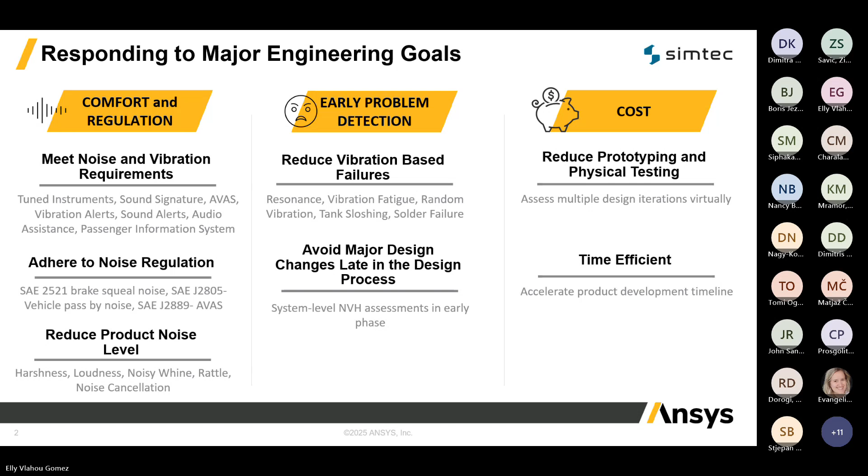And third, cost. Physical prototypes and testing are expensive. Simulation helps us cut those costs and speed up development by reducing the number of prototypes we need. Now, NVH isn't just about the motor. It's everywhere in the vehicle.

We are talking about powertrain and electric motor, cooling systems and fans, tires and suspension, wind and aerodynamic interactions, structural components, etc. Simulation lets us look at all these systems individually and at the full vehicle level, so we can predict and optimize NVH performance before we even build a prototype.

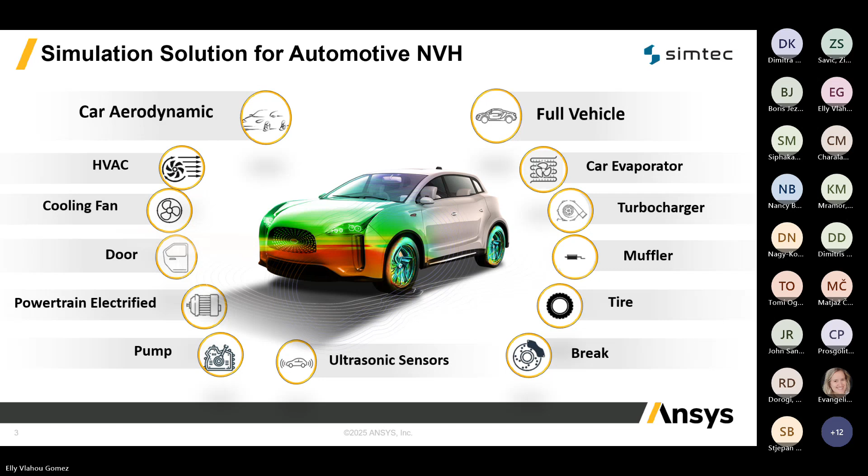Traditionally, NVH validation happened late in the process, during physical testing. That's expensive and risky because if you find a problem then, it's too late for big design changes. What we are doing now is shifting that workload earlier into the design phase using simulation. That gives us 4 big advantages.

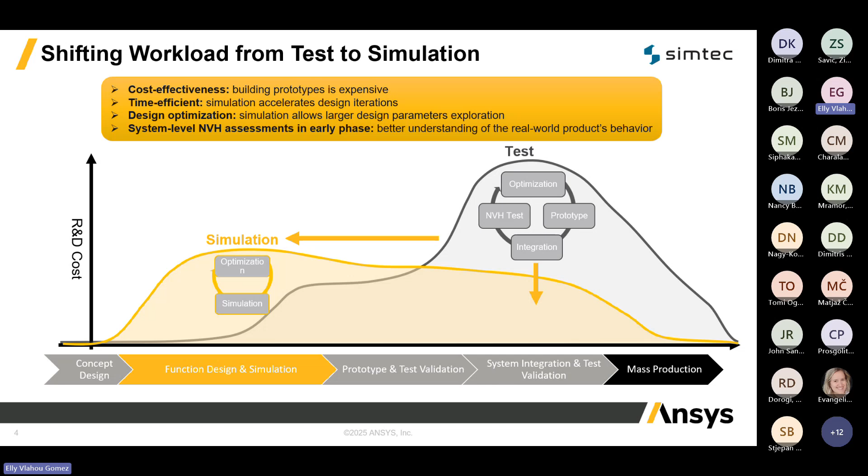It's cost-effective because we need fewer prototypes. It's faster, so we can iterate more quickly. It allows design optimization, exploring more options virtually. And most importantly, it gives us early system-level NVH insight so we can prevent surprises later on. This shift is critical for meeting today's aggressive timelines and cost targets.

Before we go deeper, let's make sure we are all on the same page about what NVH actually means. NVH stands for noise, vibration, and harshness, a term that describes how mechanical and acoustic energy from systems like motors, gears, fans, or road interaction is perceived. Noise is the unwanted sound generated by different vehicle components. Vibration is the oscillation that passengers feel through the structure of the vehicle.

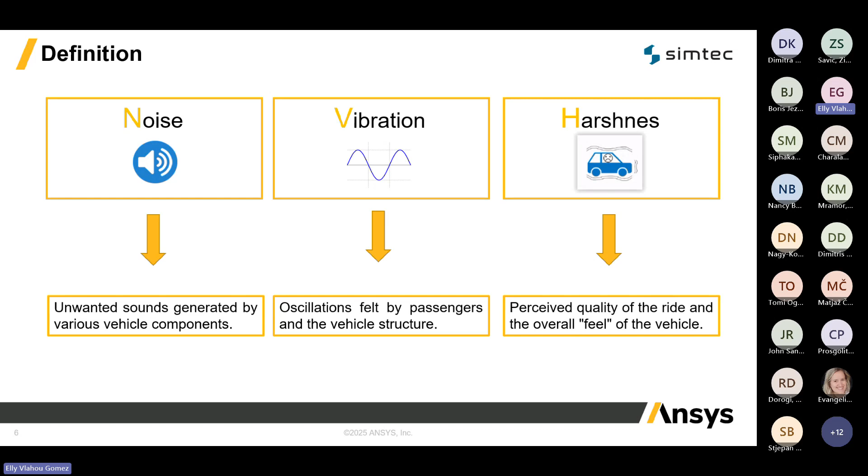And harshness is more subjective. It's about the perceived quality of the ride, the overall feel of the vehicle. So NVH isn't just about sound, it's about the entire experience of comfort and quality.

As we mentioned earlier, noise in a vehicle comes from different sources. For convenience, we group them into 3 main categories: electrical, mechanical, and aerodynamic. On the left, you can see examples of each, and on the right, how they all combine at the system level. To control NVH effectively, we need to understand and characterize all these sources, from individual components all the way up to the full vehicle.

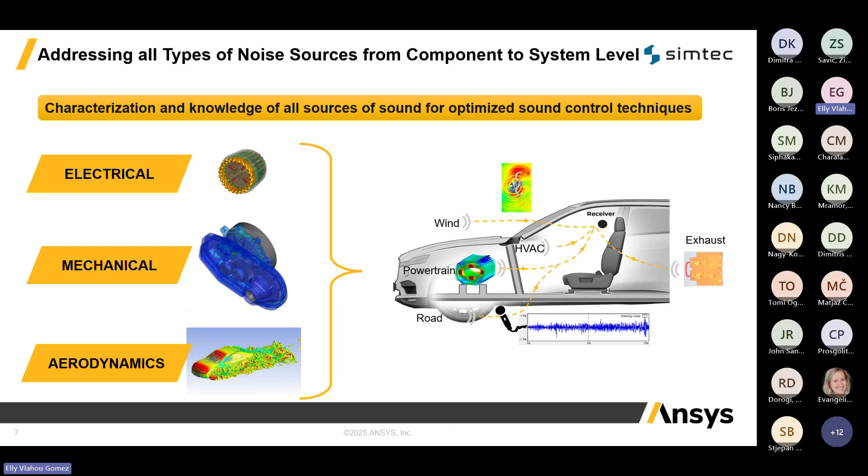Let's move on to some basic simulation workflows for NVH analysis using different Ansys tools. These are 4 example workflows that Ansys provides for NVH analysis. Each workflow combines specialized tools to capture the physics accurately and predict sound and vibration behavior. Let me walk you through them briefly.

First, the e-drivetrain sound workflow. We start with Ansys Maxwell to calculate electromagnetic forces on the rotor and stator. These forces are then passed to Ansys Motion for a multi-body simulation of the drivetrain system, including force transfer to the housing. Finally, Ansys Sound is used for order analysis, psychoacoustic evaluation, and sound design characterization.

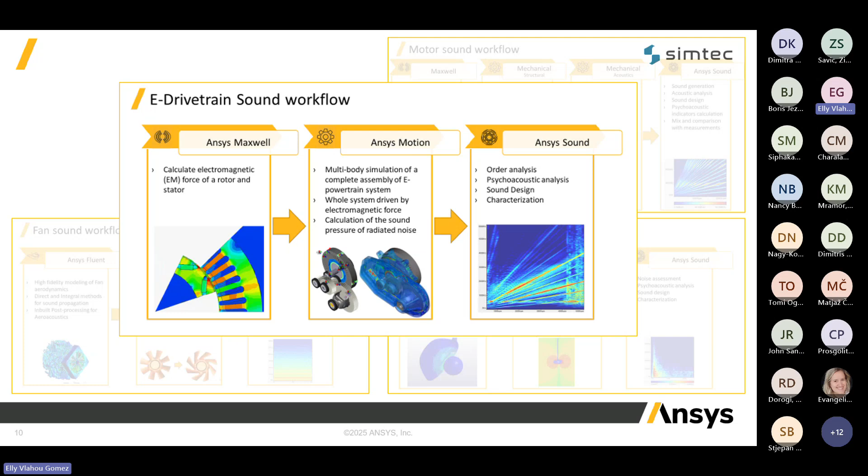Next, the motor sound workflow. Again, we begin with Maxwell to compute frequency-dependent forces from electromagnetic harmonics. These forces feed into Mechanical for structural analysis to calculate structural response and vibration. Then, using Mechanical for acoustic analysis, we predict radiated noise, and finally, Ansys Sound evaluates sound quality and compares results with measurements.

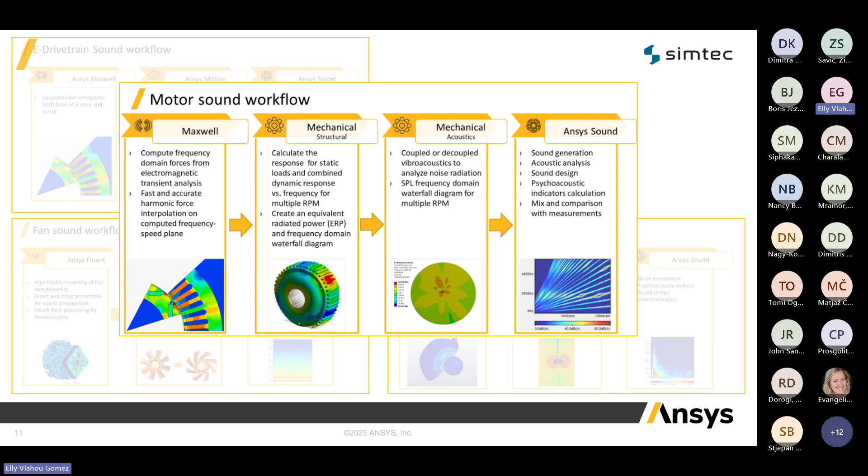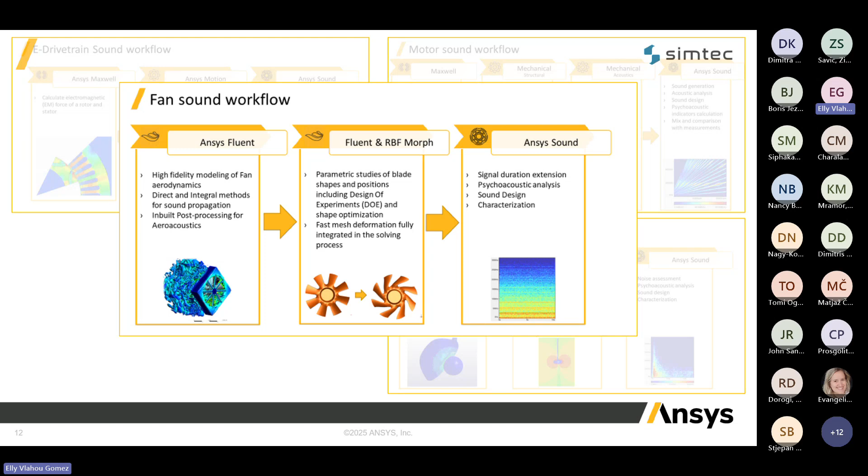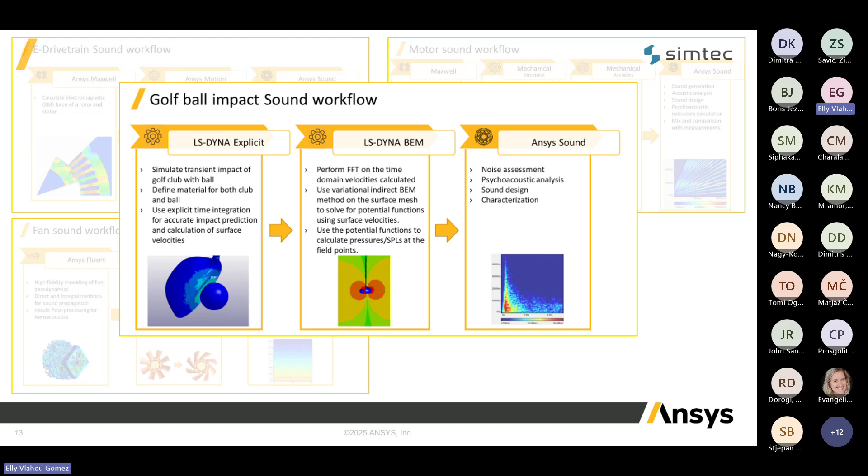Finally, the golf ball impact sound workflow. This uses LS-Dyna explicit to simulate the transient impact of the ball with a club, followed by LS-Dyna boundary element method for acoustic radiation prediction. The results are then analyzed in Ansys Sound for noise assessment and sound design.

These workflows demonstrate how Ansys integrates multiphysics from electromagnetics and structural dynamics to acoustics and psychoacoustics to deliver accurate NVH predictions for electric motors and related systems.

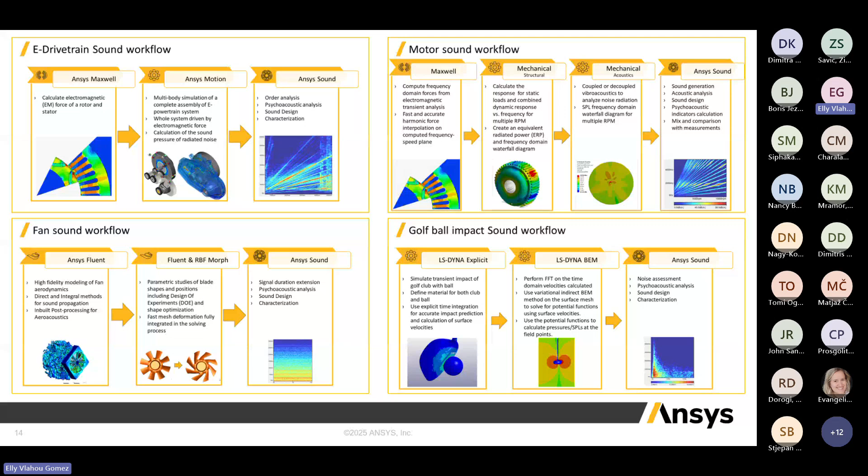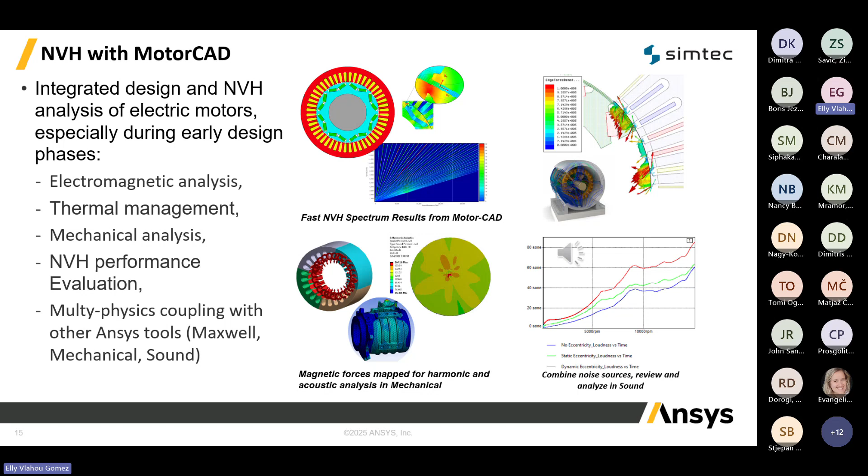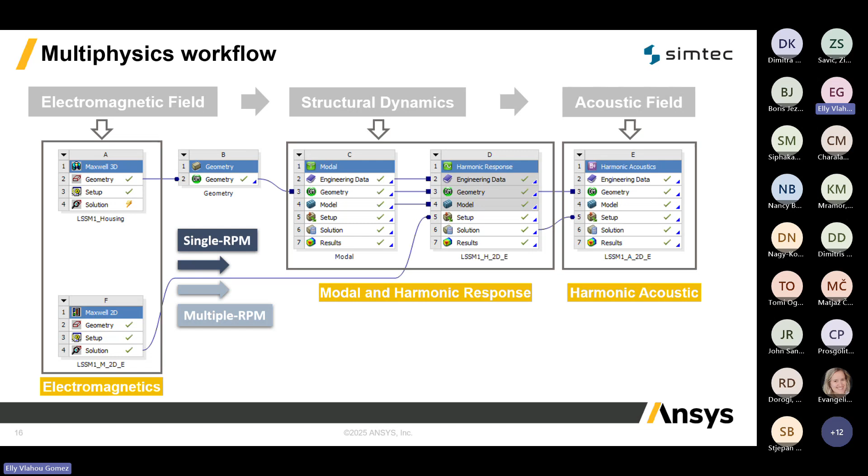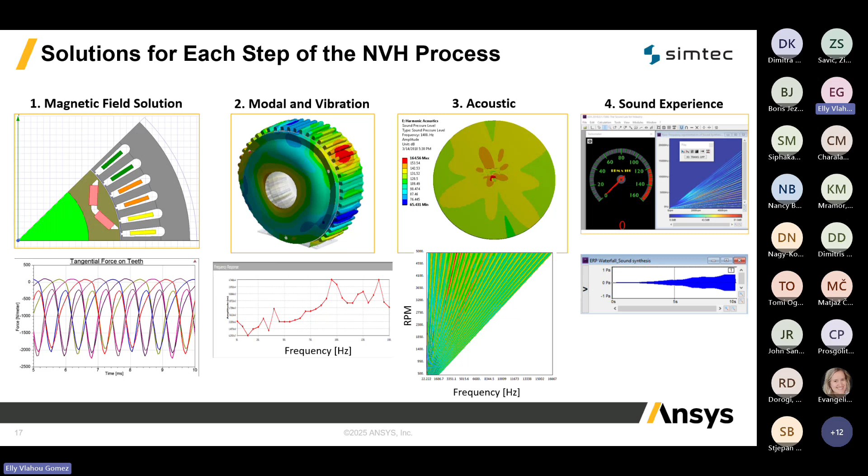To make this easier to follow, we'll break the process into 4 steps. Step 1, magnetic simulation to calculate electromagnetic forces. Step 2, structural simulation, where we incorporate all forces and analyze vibration. Step 3, acoustic simulation, predicting how those vibrations radiate as noise. And step 4, sound experience, where we actually listen to the predicted sound and evaluate psychoacoustic metrics. We'll go through each of these steps in detail using this system and process as our guide. Let's start with the first step.

The first step in the workflow is to calculate the magnetic forces. These forces can come from different sources: regular forces on the stator teeth, high-frequency drive switching, or even unbalanced magnetic pull. Typically, we calculate these forces in the time domain for electric machines and then convert them into the frequency domain. Why? Because the frequency representation helps us identify dominant harmonics that could cause resonance later on. So, what do we get? Radial, tangential, and axial forces. These are the inputs for the next step in the workflow.

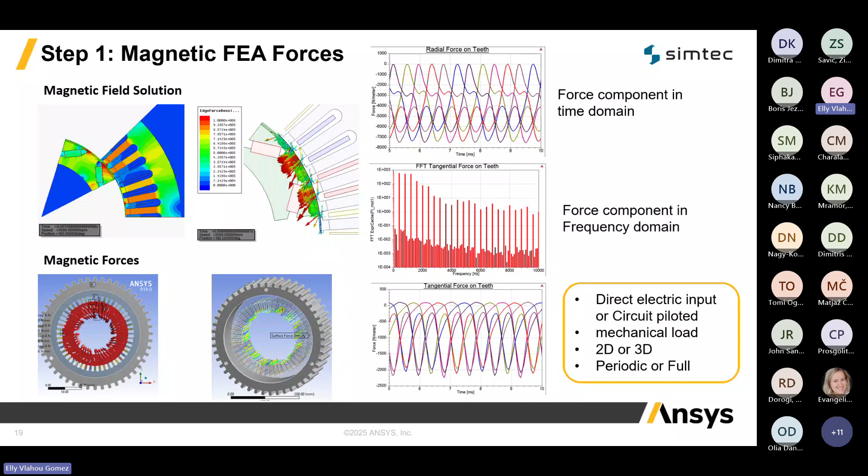On the left, you can see the magnetic field distribution from Maxwell 2D. This shows how the electromagnetic forces are spread across the motor at different RPMs. Below that, we have the magnetic forces mapped on the geometry. On the right, the plots show the force components in the time domain and then, after FFT conversion, in the frequency domain. This is critical because it tells us which frequencies will drive vibration and noise. We continue to the second step.

The second step is all about understanding how the structure responds to those magnetic forces we calculated earlier. We start with modal analysis, which is a free vibration simulation. This tells us the natural frequencies and mode shapes of the motor and housing, basically how the structure wants to vibrate. It's critical because if any of those natural frequencies line up with the electromagnetic excitation, we can get resonance.

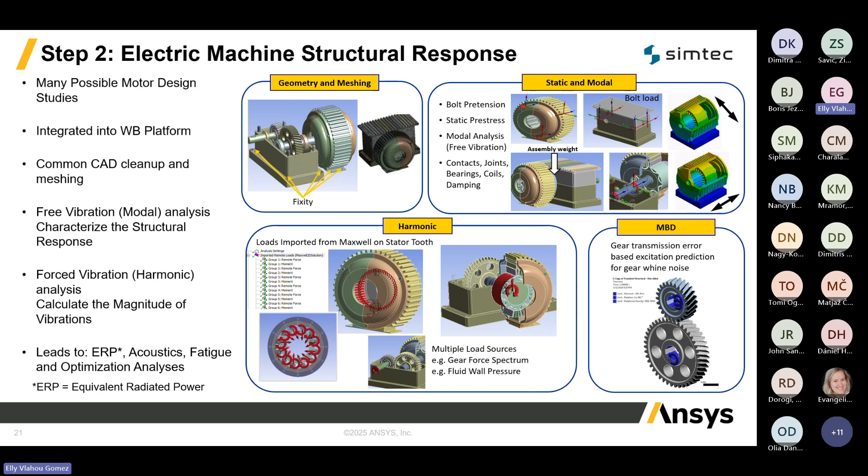Next, we bring in the magnetic forces and moments from Maxwell and apply them in a harmonic response analysis. This simulates how the motor and housing vibrate across a range of frequencies when subjected to those forces. It helps us predict vibration levels and identify critical resonance points. The results from this step feed into ERP calculation, acoustic analysis, fatigue studies, and even optimization. And because everything is integrated in Workbench, we can share CAD, mesh, and parameters easily for design studies and sensitivity analysis.

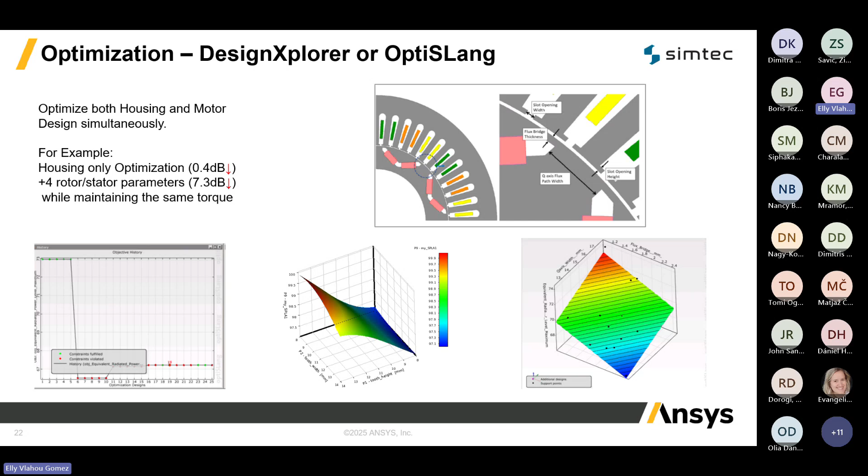After analyzing both magnetic and structural behavior, we can take it a step further with an optimization study. And here's where multiphysics really makes a difference. Instead of optimizing just the housing or just the motor, we can optimize both together using parameters from the electromagnetic and structural domains. Why is that important? Because NVH performance depends on the interaction between these physics. Tools like DesignXplorer or optiSLang make this possible by running design studies and sensitivity analysis across multiple physics. This is how we move from good design to truly optimized NVH performance. Moving on to the third step.

The third step is where we move from structural vibration to sound. The forced structural analysis gives us surface vibration, and these vibrations are what cause pressure changes in the air. Basically, sound propagation. This one is interesting. There are two ways to look at this. ERP, or equivalent radiated power, is a quick approximation. It estimates the radiated noise based only on surface velocity. No full acoustic simulation is required. It's useful for getting a first idea of noise levels.

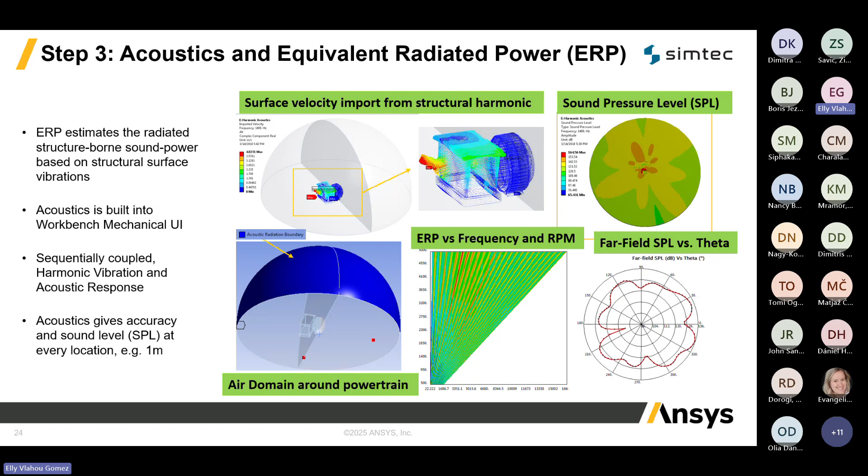But if we want full accuracy, we run a harmonic acoustic analysis. This predicts sound pressure levels, far field results, and even microphone responses. It shows directionality and gives us sound pressure levels at any location. On the right, you can see the ERP waterfall plot. This shows how radiated sound power varies with frequency and RPM, helping us spot which frequencies are the loudest. The best part? Acoustics is fully integrated into Workbench Mechanical, so the setup feels familiar. And now, let's move to the final step in our workflow.

The last step is where we take all the analysis and turn it into something we can actually hear. After reviewing the ERP and SPL results, we know which frequencies are critical and where noise might be a problem. To really understand the sound experience, we export these results into Ansys Sound. Ansys Sound lets us visualize and listen to the generated sound at specific locations, inside the cabin or outside the vehicle. This is called auralization, and it's incredibly useful because it simulates how the motor noise will be perceived by passengers and bystanders.

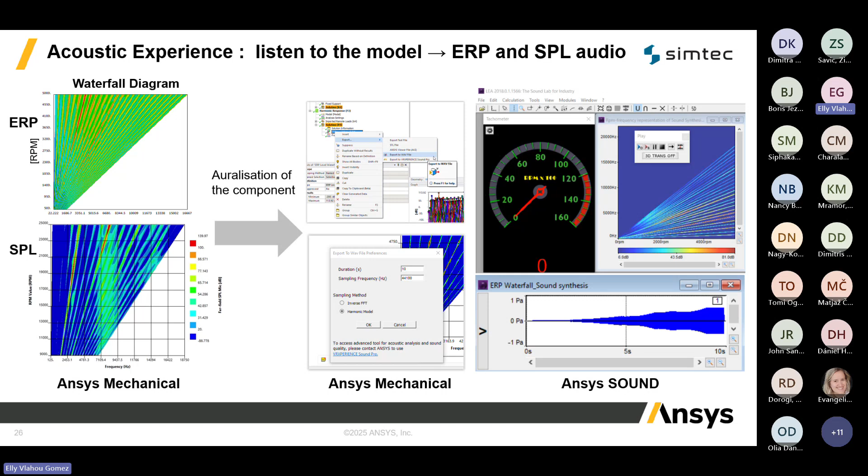By hearing the sound and analyzing psychoacoustic metrics, engineers can make informed decisions on what to change to improve the audible experience. This is where NVH analysis goes beyond compliance. It becomes part of sound design. So that wraps up today's session.